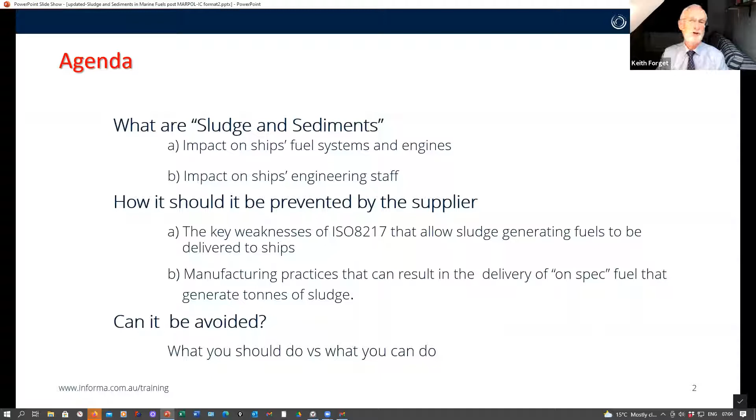So we're going to talk about what is sludge, what are sediments, their impacts on fuel systems, impact on engineering staff, how it should be prevented by the suppliers, and during that we will look at the key weaknesses of ISO 8217 that unfortunately predispose these fuels towards sludge, manufacturing practices that can result in deliveries that appear to be on spec when they're made and then go off spec, meaning they were off spec from the beginning. And then, can it be avoided? I've used two terms here: what should you do versus what actually can you do.

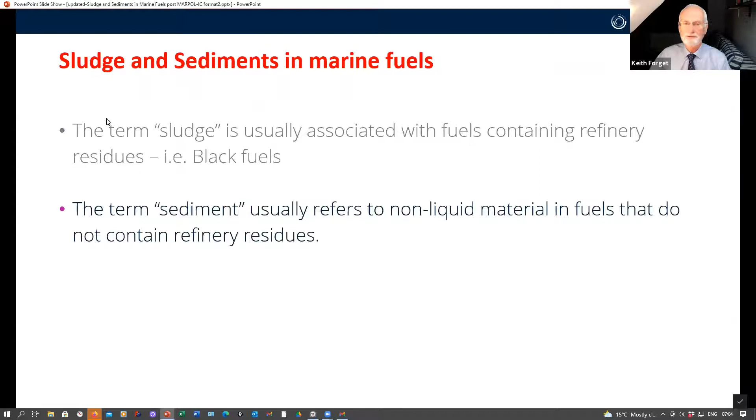So you can have all sorts of debates over what is sludge. Sludge generally refers to the black sort of materials you get in black fuels. It's associated with asphaltenes. Sediments, that word tends to be used for non-residual fuels like gas oils, diesels, etc. The two issues, if you look at them separately, they are quite different. The problem that we have is that they're used interchangeably. People refer to sludge, sediments, wax, all that sort of thing. And so from a root cause investigation perspective, you have to sort out what we're actually talking about.

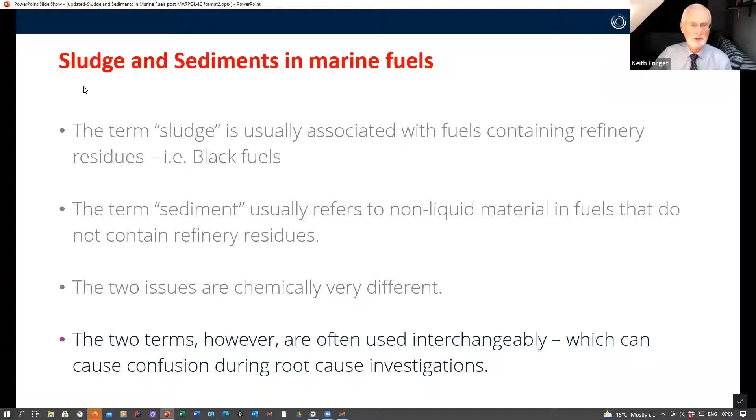Right, the impact. Sludges are invariably, when we're talking about black fuels, an agglomeration of the asphaltenes caused by a number of different mechanisms. And it's in a fuel that is blended from residues, what I refer to as refining residues, and diluents. I've used the word diluent deliberately rather than distillates, because today's fuels contain a number of different materials that wouldn't normally be regarded as distillate fuels.

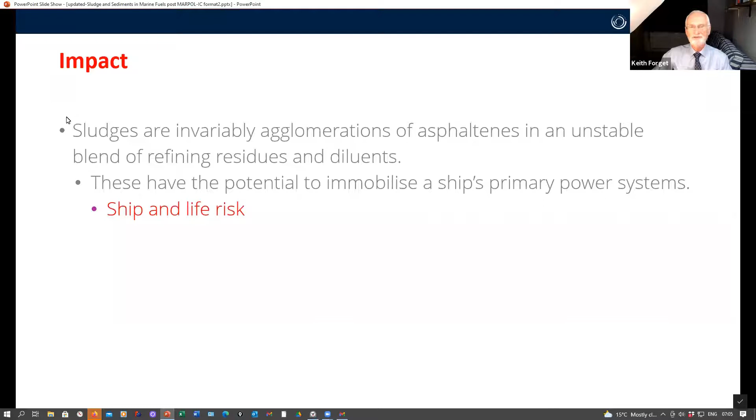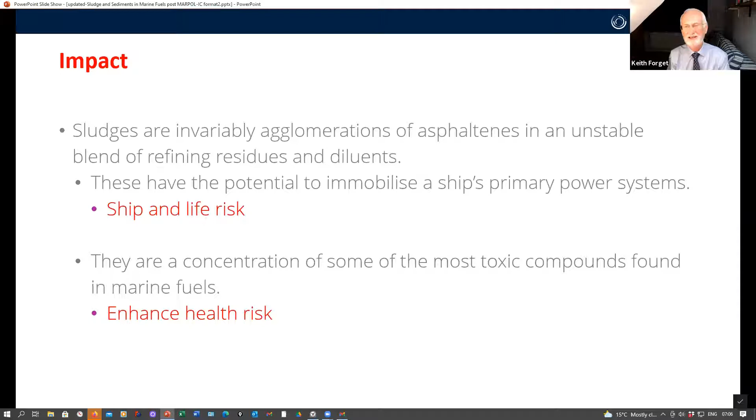Let's be very, very clear: these have the potential and have immobilized ships' power systems. So they represent a major risk to the ship and to the life of people on board. If you put the ship at risk, you invariably put the people on board at risk as well. And the other thing people often forget is that these are concentrations of some of the most toxic compounds that you find in residual fuels. Now, marine fuels are not safe; they contain a lot of toxic materials. When you have a stability issue and you have sludge, the sludge contains generally all the nasties that are there to have. So handling it is an issue, and it enhances the health risk of using fuels. The problem you've got with sludge is it's such a pervasive problem on the ship that when you're hot, you've got to get your ship moving, you get covered in the stuff. And it is actually not very good for you. Just to sort of, whoops, let me just go back one.

I just want to very quickly put onto the camera a couple of examples of sludge, just so that we're very clear. If you could make your images of me bigger for the moment, we'll see this material here. This is asphaltenic sludge.

This incident is about 35 years old, from a ship that started its voyage in Singapore, heading for South Africa to pick up coal, and didn't make it under its own power. It had to be towed into Durban to have the fuel system cleaned out.

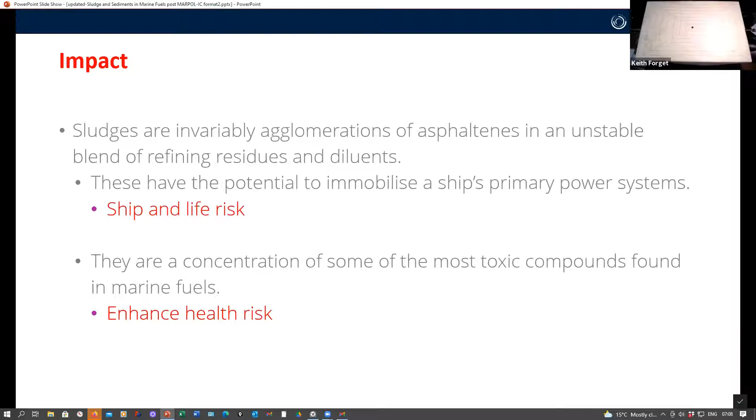This image here is a sludge that's about 18 months old, so much younger. The lumps I showed you a moment ago were a bit like this 35 years ago. As you can see, it's very thick, and it doesn't move. When your fuel system is completely covered or full of this material, things come to a halt.

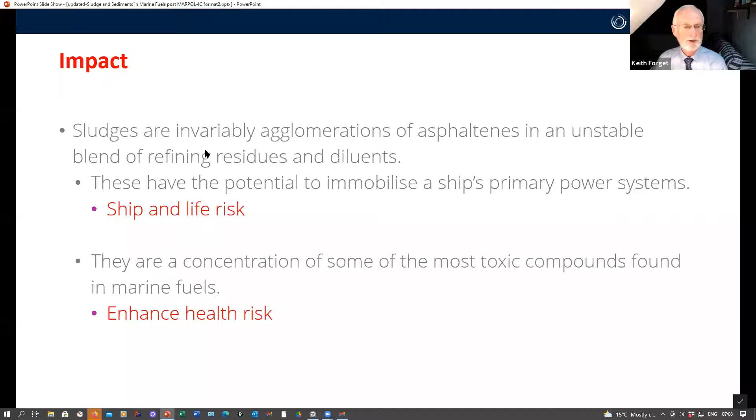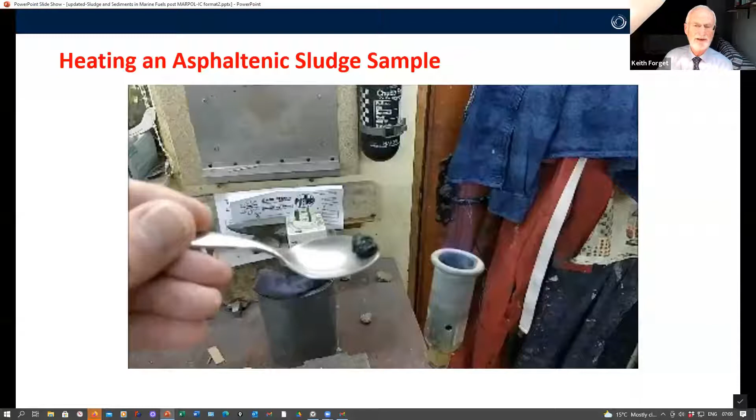Okay, you can go back to the screen now. So what I'm also going to do is show you a characteristic of the sludge, because people will often say, oh yeah, just heat it up, move it away. This is not like that. When you've got sludge, you've got a real problem.

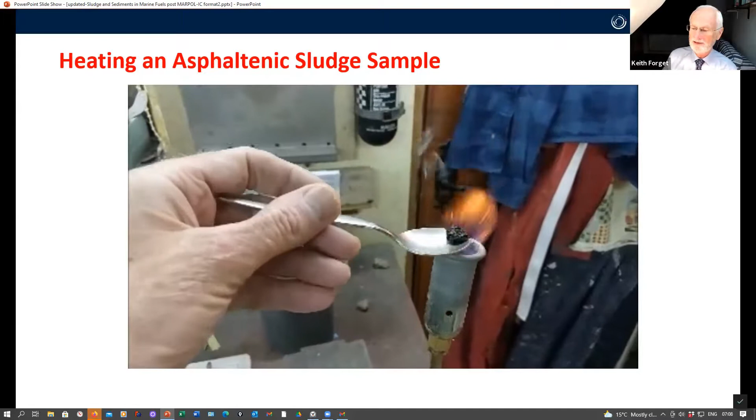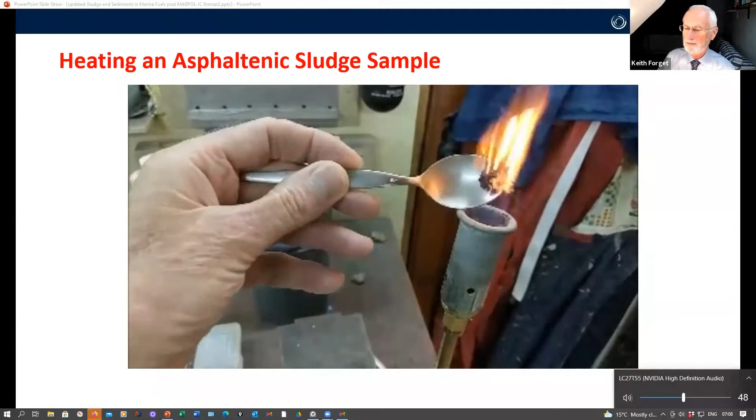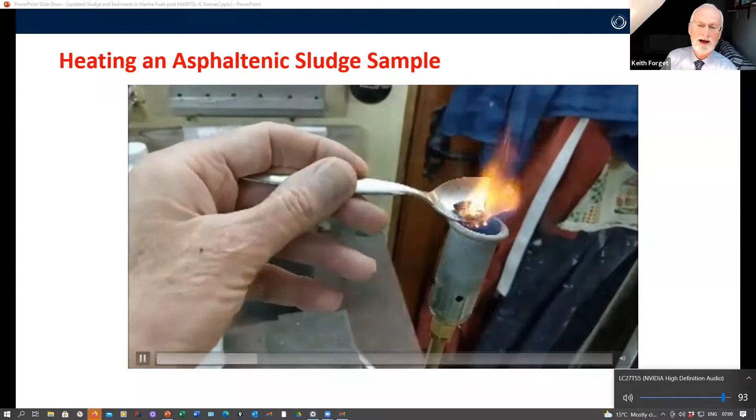So this is a sample of the sludge that I just showed you in the pot. You may be able to hear the crackling, and you'll notice it doesn't melt. That spoon is now up in the hundreds of degrees centigrade, and you can see it doesn't melt, it's crackling. Now, why is it crackling? It's crackling because it's full of water.

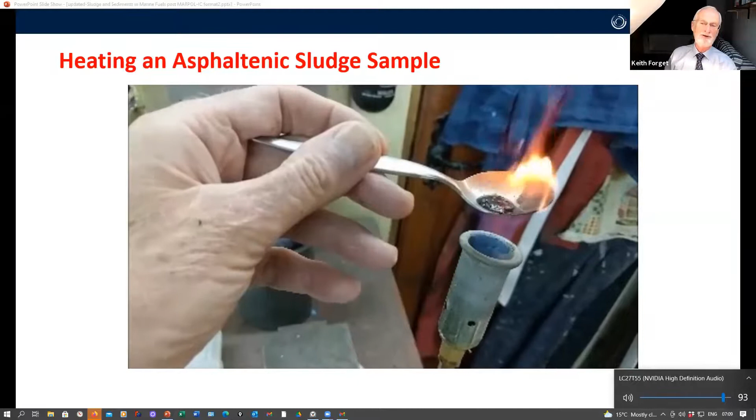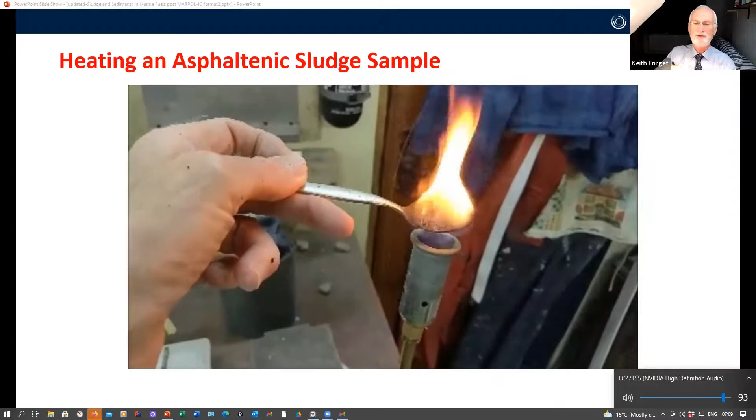One of the characteristics of asphaltenic sludge is they're very polar, and they will absorb water, so the sludges are very rich in water. As you can see now, you've got several levels of water. You've got very large blobs, which give you the big crackles, and then as time goes by, you start taking out the smaller particles of water, and eventually it starts to burn.

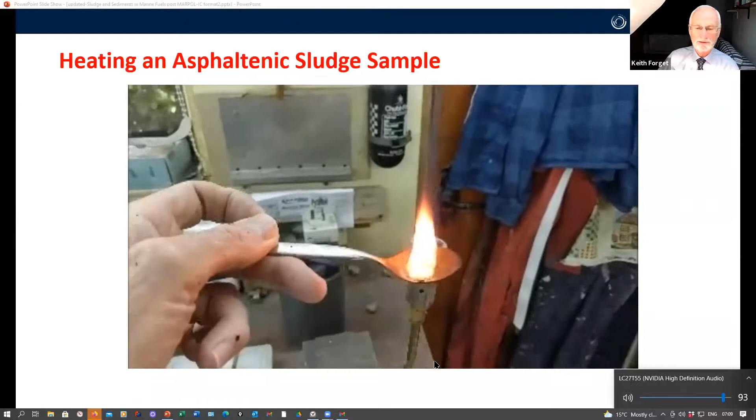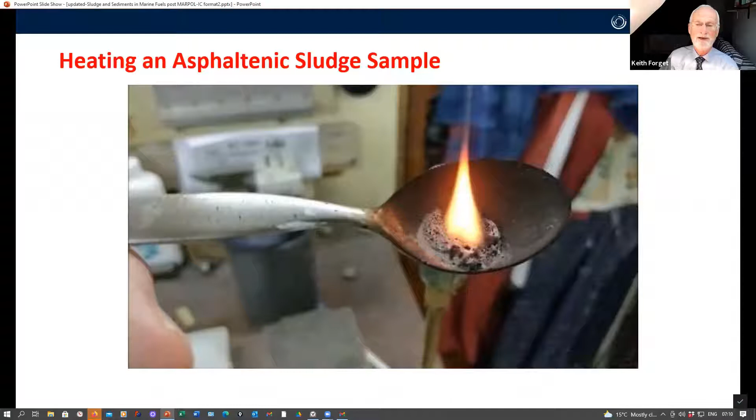Now, what is also important - I'll just move this one along a little bit so that it burns, let's just take it to there - and you'll notice it leaves a really nasty deposit. Now, this is burning in an open environment, and it's having plenty of time to burn. If you imagine these little particles - now I'm not talking about the actual sludge, but the actual particles -

that get through to the engine when you've got an unstable fuel, and they enter your combustion chamber, they do not burn out. They form those carbonaceous materials, and they give you all sorts of problems in your piston ring belt, because they will hit the side of your cylinders, probably still burning, when they will immediately go out. They may disrupt the lubricant film, and they certainly will get picked up by the piston ring pack, which will then start to get blocked, and can block completely in a relatively short period of time. So this is serious stuff.

You cannot, in my view - this sort of stability is the single most important thing of fuels, because it can and has stopped ships in the water. So root causes of these sludge problems - and I'm putting a caveat in here, and I know this upsets people, but I'm assuming that you keep your fuels completely segregated on board. It has never been more important, but it's always been important.

If you're mixing fuels from different batches, the risk of it going unstable - I'm talking about residual fuels - of course, the risk of it going unstable is very high. And so if you're mixing different fuels, you're asking for trouble.

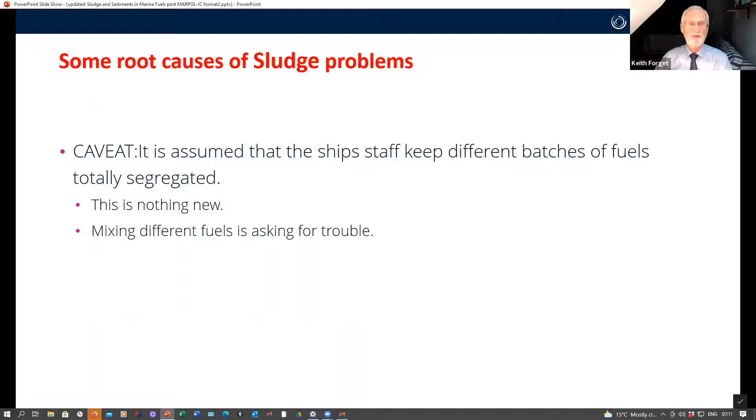The main risk is, in fact, these days from the suppliers. And the main problem is ISO 8217, because they use it as a manufacturing specification. It is not, never has been intended to be a manufacturing specification. But people pick it up and they think, oh, here we go. If I follow this, I can make a fuel.

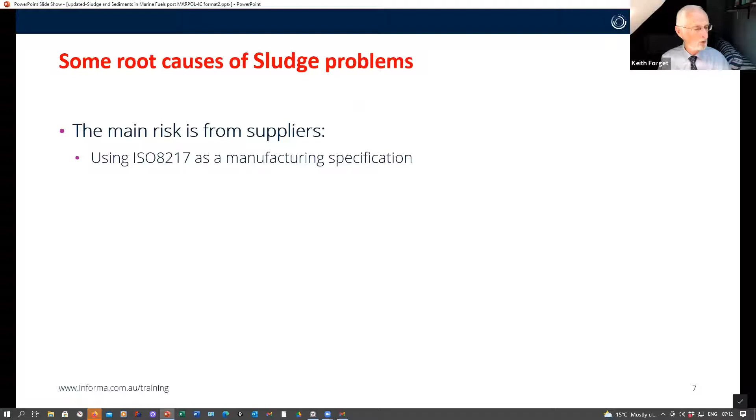And you have this little booklet here, which is ISO 8217. If I was to say, when I was directly involved in this business, the specification for marine fuels was much, much bigger than that little pamphlet I just gave you, because the manufacturing process is far more complex, and there has to be a lot of procedures and processes in place to make sure that you then have a fuel that actually meets this specification, which is really a selling specification.

The big problem with ISO 8217 is that people misuse the data. First of all, they refer to tables 1 and 2, and they think as long as I meet those tables, I'm all right, I'm on spec. Well, no, it's not quite like that.

It's really important that one understands that the standard includes a number of clauses, one of which is clause 5, referred to essentially as the general requirements.

I was involved in working group 6 for the development of ISO 8217 2005 and 2010, so I've got a pretty good idea how those working groups work and how difficult it is to get them to see sense. If I look at 2012, there were little changes after I left. They don't sound like much, but they are fundamental changes that have taken place.

If we look at the 2012 version, it says in 5.2, the fuel should be a homogeneous blend of hydrocarbons derived from petroleum refining.

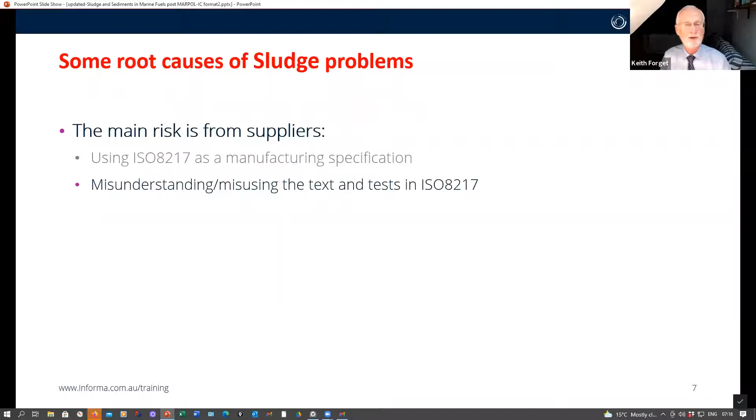Recently, I would say 15 years ago, certainly whilst I was still active, we were getting more and more problems associated with petrochemicals. So you're either misunderstanding what the specification is actually saying, or you're deliberately misusing the text, and it is a problem.

We're looking at non-petroleum refinery components, petrochemicals, chemicals - not even petroleum, but they do have a petroleum link - pharmaceuticals, catering waste, etc. They are all appearing in today's fuels. The specification just is not suitable for those materials, it was never developed for those materials, and what's more, a number of the test methods were not developed for those materials either.

This is an oddball one, and it is a difficult one. There's a material out in the market referred to as Estonian shale oil, and it is exactly what it says - it's shale oil components derived from the shale oil beds in Estonia. There's a couple of heavy streams that are sort of difficult to dispose of, but are very suitable for marine use. They appeared in the marine market some years ago.

In fact, when the first ECA came in, when the limits were 1.5% sulfur, it was a very low sulfur product, and it's really cheap. They're almost giving it away - that's not true, they are selling it, but it's very, very cheap.

The problem with this material is it's not normal, and it behaves in a completely random manner. What is even worse about it is that you can blend a fuel with a proportion of Estonian shale oil, do all your normal tests, even your normal stability tests, and it'll look perfectly okay. It will look perfectly okay. Two weeks later, you are up to your neck in sludge.

There were a number of Baltic ferry companies that had serious problems because they were getting quite a lot of this material. So we did some research, and we discovered that it is peculiar - it does behave differently, affecting asphaltenes in an unexpected way. The reality is we knew it was behaving in an odd manner, but we didn't follow that up to find out why and how we could control it. The only way you could really control it is to keep the volume down to very low levels.

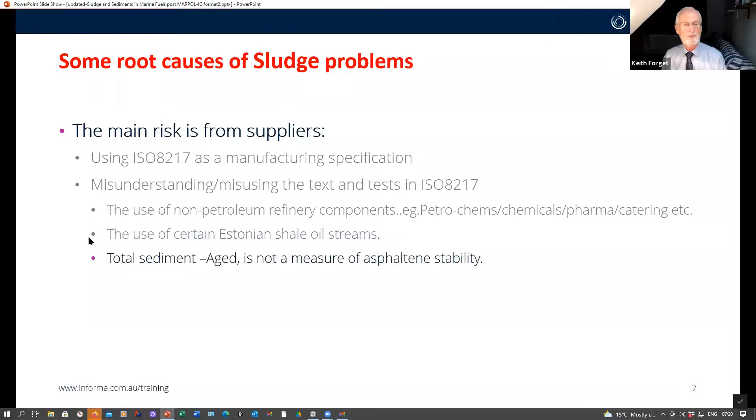And this is the biggie. Total sediment aged is not a measure of asphaltene stability. Never has been, was never intended to be, but the people in the working group could not be convinced of this. So people, when they're talking about stability, say, oh, well, the total sediment was okay, 0.03, 0.02, something like that.

It is not measuring stability at all. And so consequently, you can be doing some work and you can have a situation where you think you've got a stable fuel because you think this test is giving you stability, when in fact it's not.

And a common problem is that the limit is 0.1. And so they think if it's below 0.1, or only 0.1, then it must be stable. You can have an unstable fuel that gives you a potential of 0.1 or less.

It is important, you have to use an existent test. In other words, you do the test twice, and it is the difference that tells you whether you've got a stability issue or not.

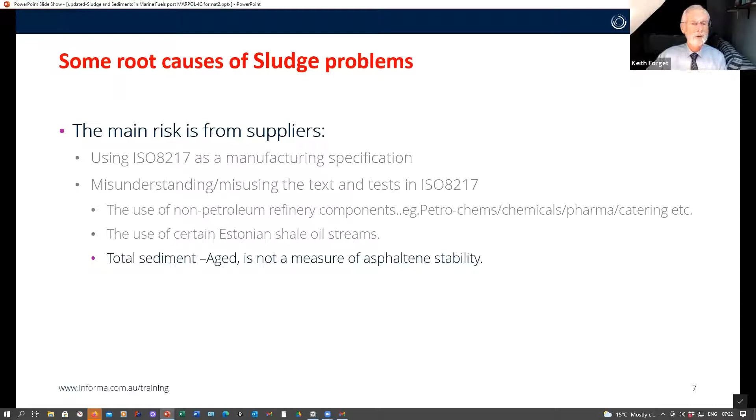And the other problem is that the normal stability tests may not be suitable when fuels contain components from non-refining sources. For instance, I did some work, again we're talking about 10 years ago, when we were looking at the possibility of using ethylene cracker residues as a fuel component.

We were looking to reduce the cost of fuel. So we did a bit of research to see what the impacts were. And on the whole, the report didn't look good. It's not a wonderful material, but it does not behave as expected in stability tests.

Plus the fact that ethylene cracker bottoms or residues contain synthetic asphaltenes of their own. Bearing in mind an ethylene cracker source, the feed material is a gas or a light liquid like naphtha. So there's no asphaltenes going in, but you certainly get them coming out. They do not follow the normal rules.

And again, I don't think anybody has, or certainly we didn't, spent the time to actually pin down what are the issues.

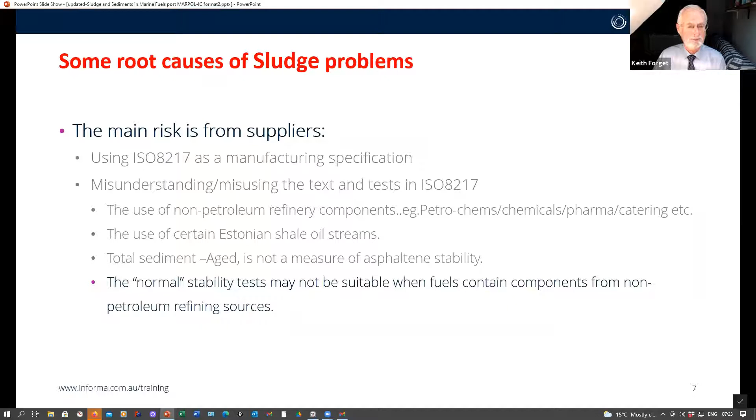So how do you minimize the risks? Well, only accept—this is what you should do, I'm not saying you can do it, this is what it should be—only accept fuels from suppliers that can demonstrate that they have full control over their supply source chain.

It depends where you are in the world as to how easy this is. For instance, if you're in the Singapore area, fortunately the Singapore government takes a keen interest in what happens in their bunker market, and they want to know if people are messing up. They've given some pretty good guidelines that their suppliers have to follow. And what is nice about Singapore, if people consistently do not follow the rules, they get struck off.

You don't get that anywhere else. So anywhere else, the problems are far more difficult. Certainly the two big problem areas are the ARA area and Houston area.

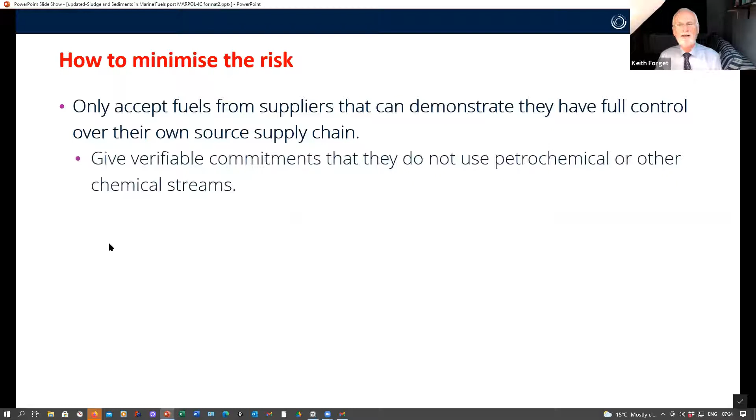Get them to give you verifiable commitments that they do not use petrochemicals or other chemical streams. If they're not there, your risk of problems is much reduced. And certainly you really don't want to use Estonian shale oil. It is not nice stuff.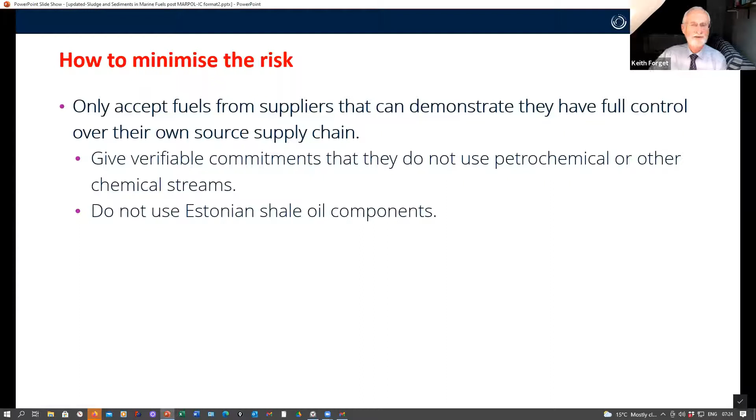You can put small amounts in and get away with it. What's small? Less than 5%. If it's more than 5%, you're running into problems, and certainly 20% is a definite problem—no question about that. Everything that we did when you were at 20%, you had immediate problems. At 5%, is it okay for the normal life of a fuel, or will it indeed go off many, many months down the road? We do not know.

And that they have proper fuel stability controls in place. That is not just being able to do an HFT potential test. They need to be able to show you how they control stability for real.

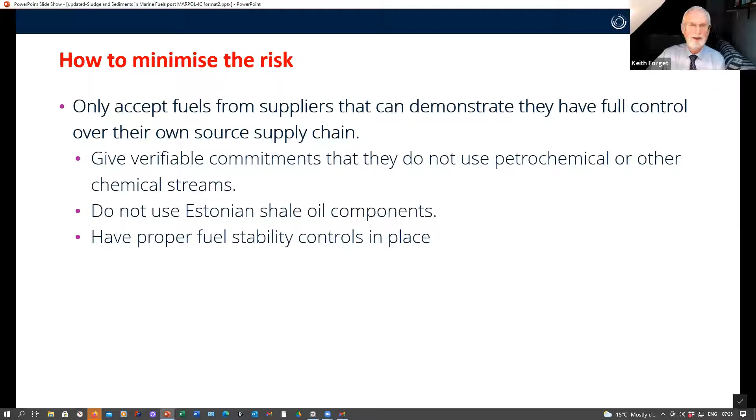Keep saying that. Only use non-petroleum products after you've done a lot of work. If you do the work and show that, yes it's non-refinery, but we've done this work and that shows it's okay. It'll never be 100%, but at least there is some evidence it can be used safely.

But when you hear the term, oh well, it's used widely in the industry, that is not proof of no harm.

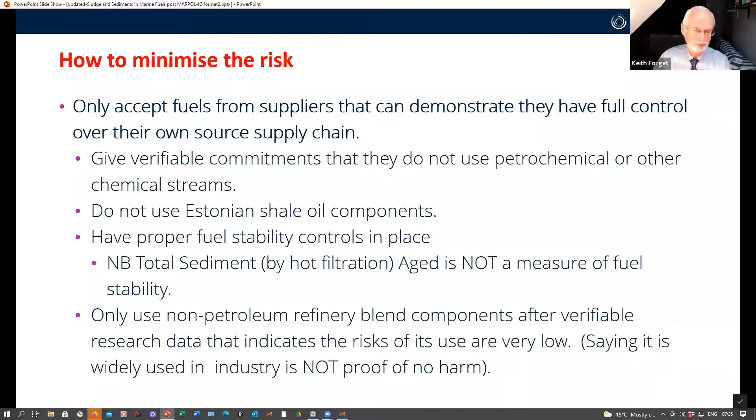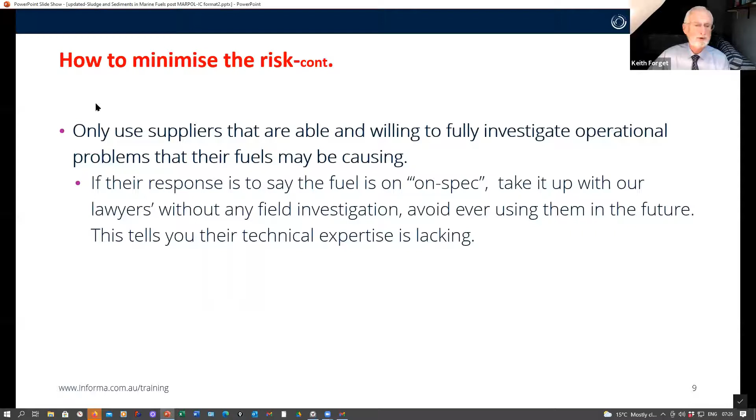And this is another one - I've seen less and less of this - but only use suppliers that are willing to investigate if you've got a problem. If they simply say, well, the fuel was on spec, take it up with our lawyers, without any attempt to sit down with you and discover what the problem is, it tells you they don't know what they're doing. And so therefore they don't feel confident in doing it, therefore they won't do it. Can't do it.

Or avoid fuels that use heavy residues. If you don't have asphaltenes, you will never get asphaltenic sludge. You might get ethylene cracker sludge, but you won't get asphaltene sludge from normal fuels.

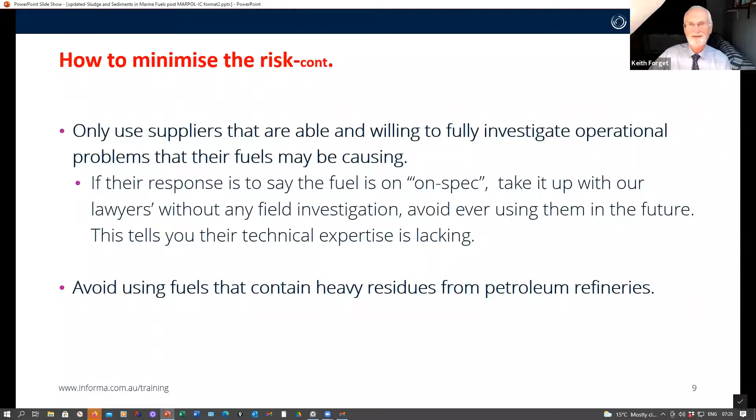So, in summary, there's an awful lot of sludge reports going around, and I'm dealing with an active case at the moment of a serious problem that could have gone really, really wrong. And there are lots of others that I've heard of, but they don't come in the statistics because you'll get them say, well, it passed the total sediment test, so it must have been okay.

Well, as I'm saying, total sediment test is not a measure of stability, and people are hiding behind it, not realizing that it doesn't do it. And let's be absolutely clear: if you just manufacture on the basis of the ISO 8217 document, you're not going to make good fuels, because it is not a manufacturing specification.

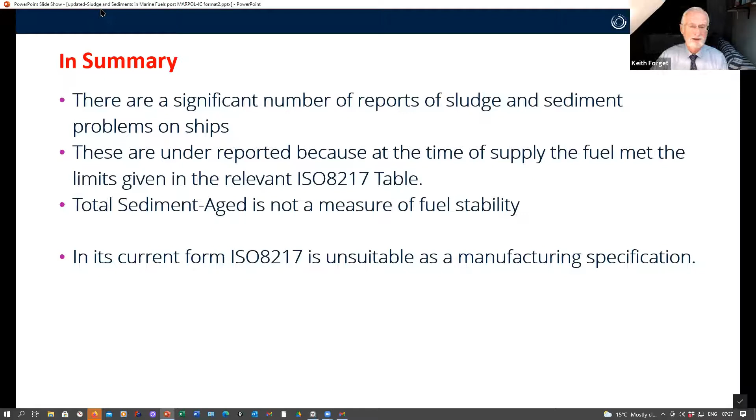And this is the one I'm always saying: do we actually need a ship to go onto the rocks because of the fuel before this problem is actually taken seriously?

Right, there we are. It's 27 minutes, so I'm just a little bit over. As you can probably imagine, there is an awful lot behind all of this that I've been talking about. But in 20 minutes, at least I have scratched the surface. And certainly I'd be willing to take questions.

Now, do I go on to the next slide, Holly? Yes, if you could, that would be great.

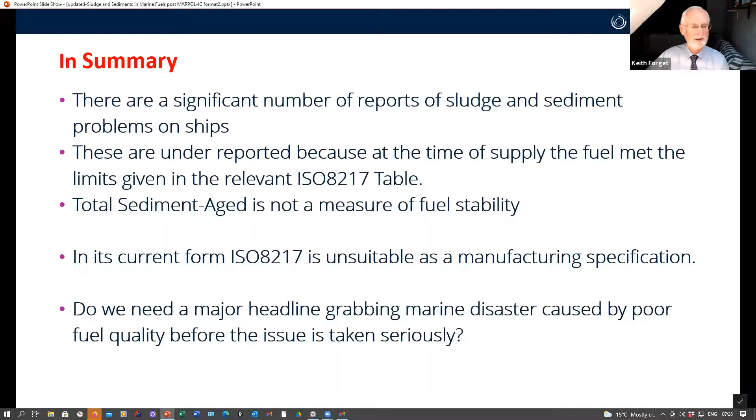And Keith, thank you so much for that insight. As you mentioned, it's a topic you could talk on for days, but it's really good to get that background and obviously some of the risks as well. And that last point you made was very pertinent and one that needs to be front of mind. So thank you so much for your time with that.